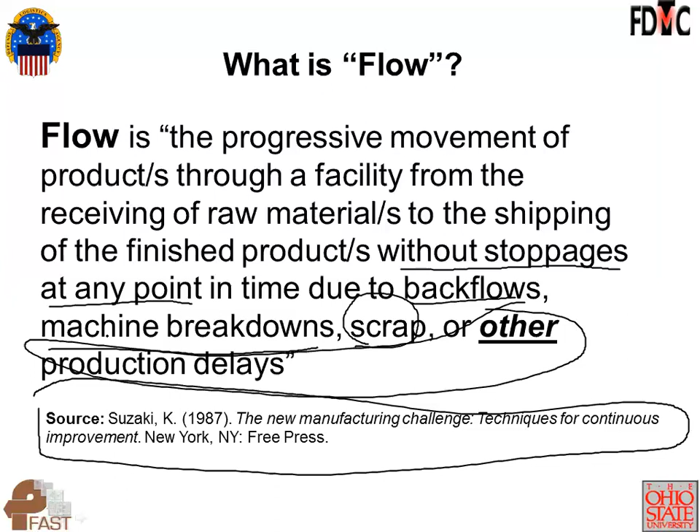So I believe that more than waste elimination, designing a manufacturing system and its support services, the supply chain, for flow is what is better, and that waste should be seen more as a symptom, as a metric, and not a goal unto itself.

So I took my cues for design for flow from this book by Taiichi Ohno, the godfather, the pioneer of the Toyota production system. I read through his book at least twice, and pertinent to this particular lecture about reduction and simplification of material flow, I found some of these quotes in his book extremely inspiring and foundational.

So page 11, he says: I was manager of the machine shop at the Koromo plant. As an experiment, I arranged the various machines in the sequence of machining processes. That's very important—in the sequence of machining processes.

So what he's essentially saying is, look at the routing for every product being produced and ask if the equipment being used to produce that particular product is aligned in the exact sequence as the product would flow through that sequence of machines. And right there you will see the gelling of the concept of functional layout against cellular.

Page 33: We realized that the Kanban system would not work unless we set up a production flow that could handle the Kanban system going back process by process. So there's a connectivity that he thinks is very important to set up. Usually when we design a layout, that's the connectivity we would like to set up, where consecutive equipment requirements are adjacent to each other. But what he's getting at is that production and inventory control cannot be done very effectively if you do not have systematic, streamlined material flow in the first place.

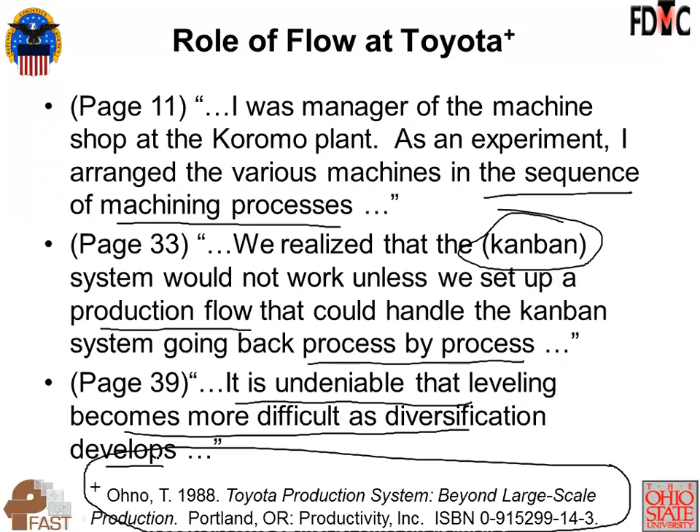Continuing on his book's quotes: Toyota's main plant provides an example of a smooth production flow accomplished by rearranging the conventional machines after a thorough study of the work sequence. Again, that is what we all do in facility layout—we look at how the different products' routings align with respect to each other. The challenge is getting all the equipment for every one of the products aligned exactly in the sequence of steps that the product will follow as it gets made.

Next quotation: it is crucial for the production plant to design a layout in which worker activities harmonize with, rather than impede, the production flow. This is about respecting the design of workstations and how individual workstations sometimes get arranged into U-shaped layouts, because when work cells are designed in a U-shape, employees work uninterrupted inside the U and all logistical support to the cell occurs outside the U.

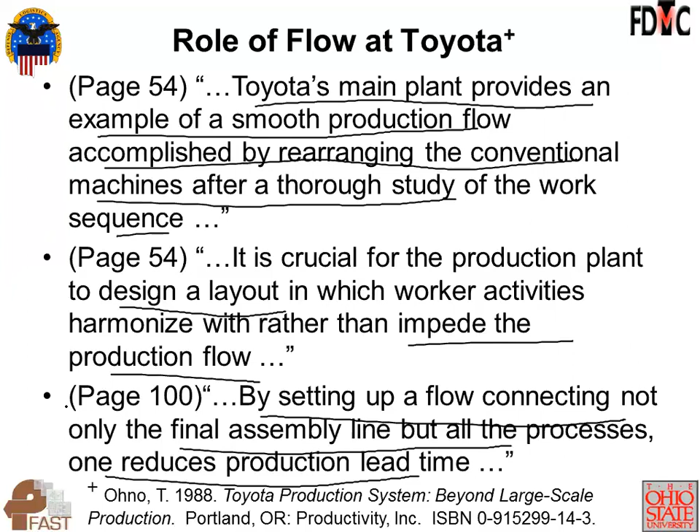Another quote: by setting up a flow connecting not only the final assembly line but all the processes, one reduces production lead time. What he's saying is that the total time it takes for the product to travel from raw material to finished product is implicitly connected to the overall structure of the factory—all the components and sub-assemblies, as you track their movement through various pieces of equipment, are aligned and deliver products to different points at the point of use on the assembly line.

Page 123: when workflow is properly laid out, small isolated islands do not form. Think back again to the debate between functional layout—putting all equipment into departments where similar, identical equipment alone is put in each department—as opposed to work cells, where equipment is taken from different departments and co-located in an area, so the work cell takes charge of producing from raw material to finished product in one area.

Next quote: for the worker on the production line, this means shifting from being single-skilled to becoming multi-skilled. Once again, if you co-locate different pieces of equipment into a work cell, automatically you are going to have to train the employee—they need to get cross-trained and multi-skilled in order to take raw material through steps 1, 2, 3, 4, 5, as many as needed to complete the product. That requires a high level of cross-training.

So personally, I think the future is about better skilled employees, not about job loss. I think there'll be a bigger demand for education and training of employees to work in a more high-tech environment.

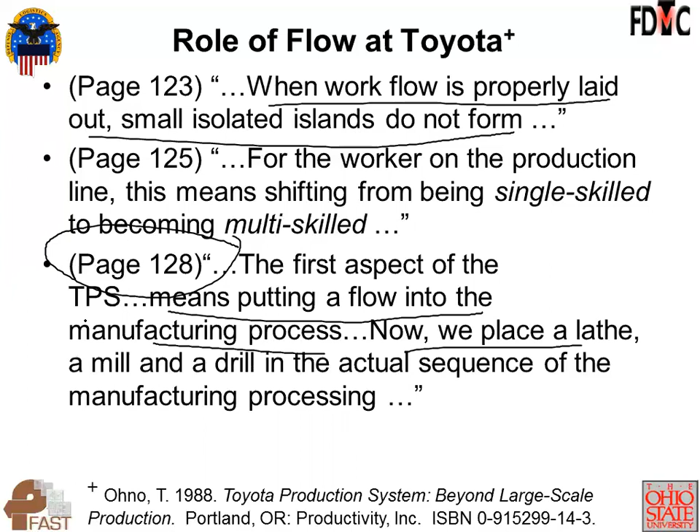When you look at things like value stream mapping, implicit even in those methods is this underlying emphasis on: have I aligned the manufacturing equipment and the overall factory per the logical coming together of the components, the sub-assemblies, and the final product? That is what is fundamental. I think that's what's actually missing in the way US manufacturers have designed their plants, versus how Toyota seems to be thinking about the way they build their factories.

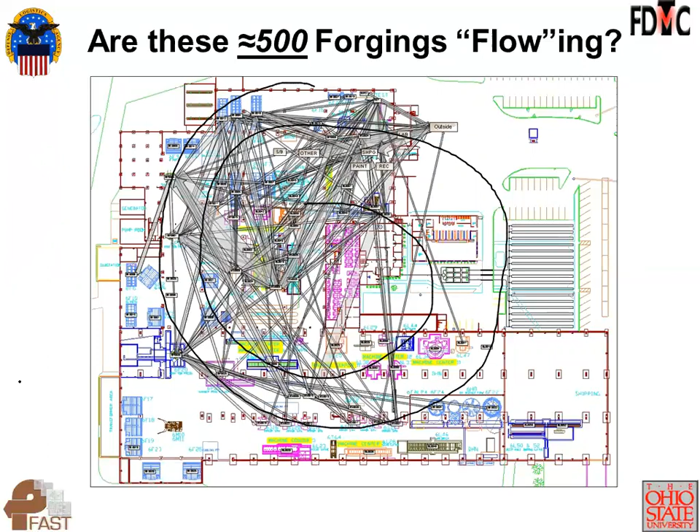They tend to have heat treatment furnaces, which are process or batch production type of equipment. You just don't get one piece flow. And then when you have these large travel distances, communication is poor, scheduling and shop floor control are challenging.

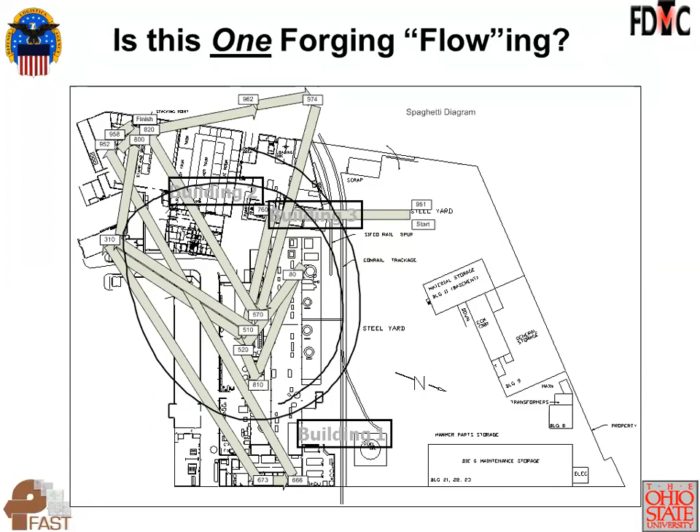Again, a simple spaghetti diagram will tell you quickly whether or not the facility layout is designed for flow. And if it is not designed for flow, then you should understand that there is a lot of cost and delay built into its efforts to fill customers' orders.

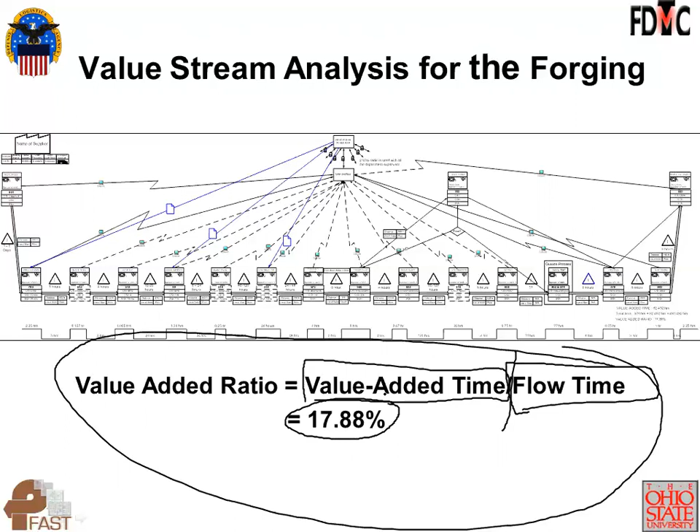I feel that if you worry about the total time that any order spends inside the facility in process, that's way more important than worrying about, oh, let me go and pursue waste elimination as a strategic objective. So in my personal opinion, I feel that...

If we focus on material flow, faster, better, cheaper, and we design systems and processes and support services on the principle of flow, implicitly the occurrences of the different forms of waste is going to be minimized, rather than sort of start by saying, okay, we are going to pursue waste elimination across the enterprise, and then you do what is called continuous improvement by whack-a-mole.

Everybody's doing a little bit of a thing, and then somebody's improvement is coming in the way of somebody else's improvement. So personally, I feel that waste elimination is not recommended. Design for flow is recommended.

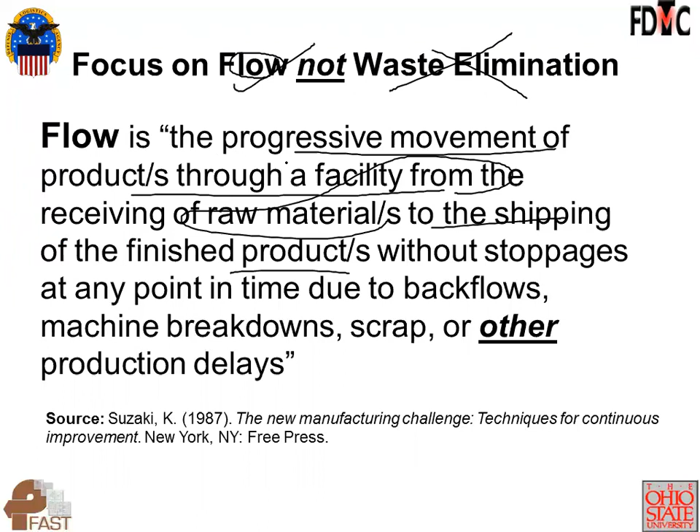Why aren't we able to do that? Why do we take so many weeks to complete an order? Can we bring it down by a few days? Can we bring it down by a few more days?

If we focus purely on what we can do today to bring down the average time it takes us to complete an order, we will be on our way to being lean, to being quick response, to being flexible. That's just a personal opinion.

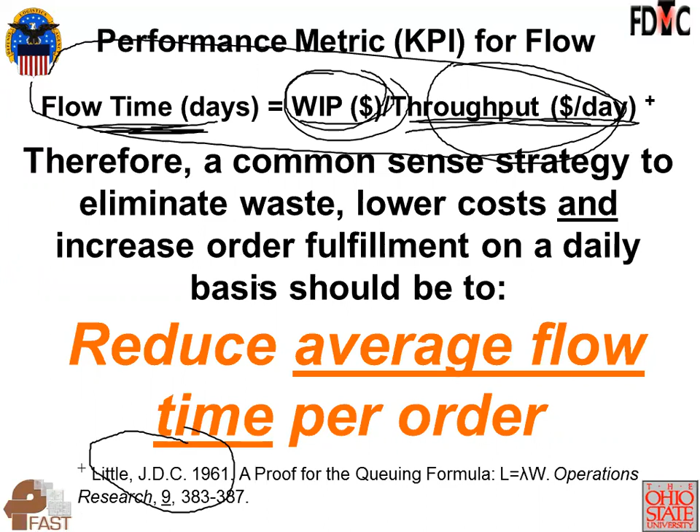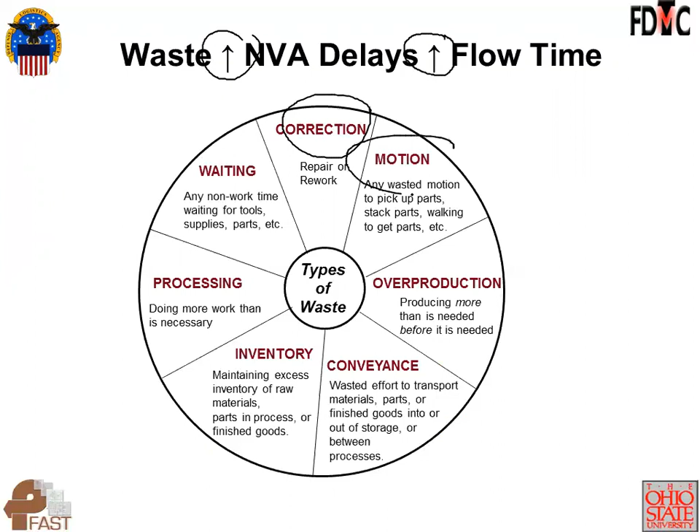Sometimes they use this acronym DOWNTIME or TIMWOODS, but these are 7 ways: correction, operator motion, producing product and leaving it in a warehouse, transportation, any form of work in process, over processing where you take too many steps or have too much setup time or very high cycle times, and of course, waiting. So there are 7 forms of waste, and they help crystallize and measure why it's taking us so much time and dollars to fill an order.

I think it's very important to understand that the wastes translate to delays in flow time.

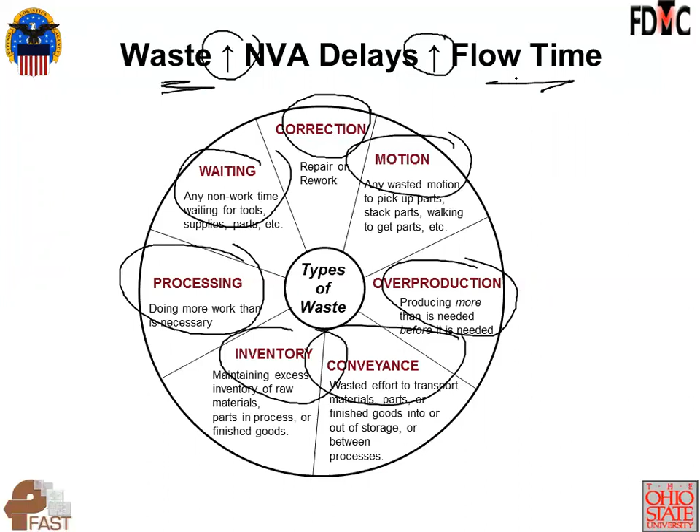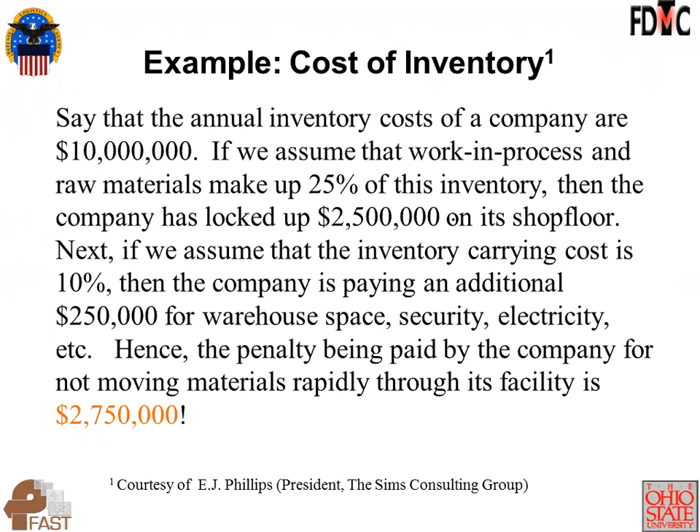Accountants may have better ways to quantify the total cost accrued of any order as it runs its way through the shop.

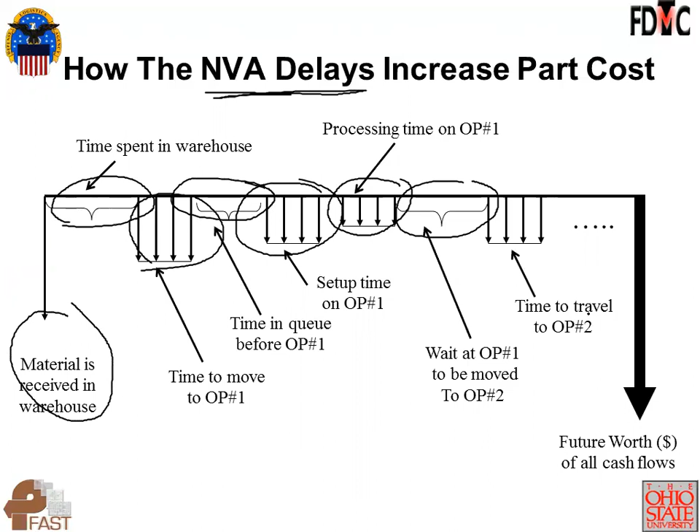And then it repeats, and this continues. When you look at all these activities and reduce them to point cash flows or uniform series cash flows, you can compute something called a future worth. That future worth is the true cost of an order, which oftentimes, because accountants and estimators are not factoring in the 7 forms of waste, means they may be underquoting on their margins to customers.

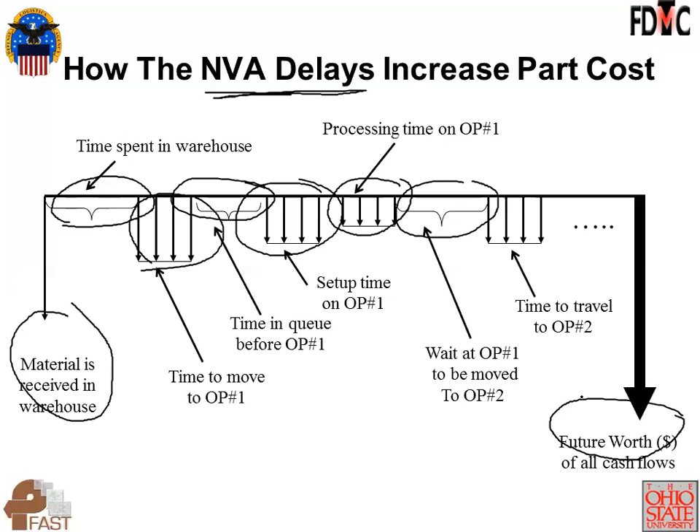What has come out for sure over time—and this was a chart created by Professor Eugene Merchant, recognized as one of the gurus of metal cutting, back in the 70s—he looked empirically at the total time a machined part spends inside a machine shop. 5% of that time was spent actually on the machines, whereas 95% of the time in the facility was spent moving and waiting. These are 2 of the 7 forms of waste.

What was interesting was he came back and said that even that 5% the part spends on the machines, only 30% of that time is it actually having work done on it—metal being removed. The rest of the time is necessary preparatory work, but the part isn't gaining value. It was pretty interesting that back then in America, somebody had recognized the connection between lost time and cost and order fulfillment. And this was in machine shops, not a big assembly line like Ford.

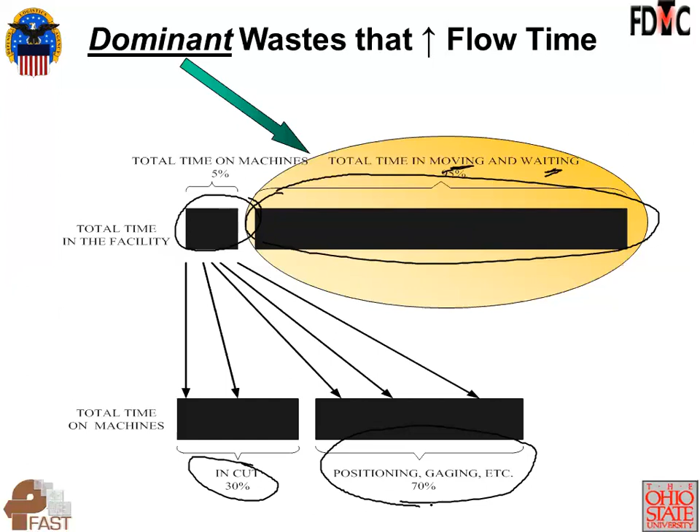So when you want to connect how factories are built to get good flow and the total time it takes to complete an order, here's the domino effect. When a facility layout is badly designed, where you have not factored in the placement of equipment to conform with the actual processing sequences of different components and sub-assemblies, you will find that the average travel distance per order is high. When that happens, transportation waste is high. And when transportation waste is high, work in process waste is high. When work in process waste is high, waiting waste is high, which implicitly results in flow times being high, throughput and orders completed being low, and the overall operating cost of the facility being high.

So there is no mathematical equation here, it's kind of empirical, but the point is that if you are not flowing the product because you've got large travel distance of separation between consecutive operations, end of the day you're not going to be profitable. Recall what Goldratt said about the 3 primary metrics that should run a business: have you got high throughput, sales dollars? Have you got low inventory costs? And have you got low operating expenses? If you haven't scored high on those 3 goals, you're not running a profitable business.

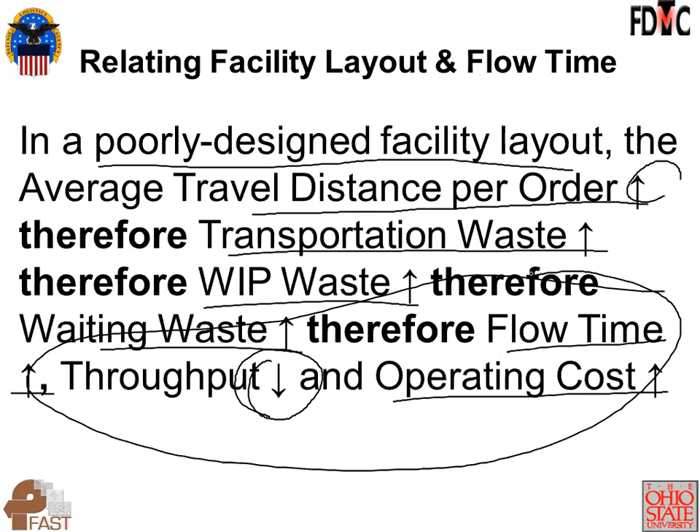How do we connect facility layout and work in process, which is basically travel distance, and the effect that has on batching? This quote came from a book from 1990, and it very simply said, if successive processes are immediately adjacent, as in an assembly line, a single unit is moved at a time. So in an assembly line, a single unit is moved, that's the lowest amount of inventory you can have.

Now put the 2 consecutive operation equipment across the aisle, that's about 14 feet, correct? So now you cannot have the operator from one machine, after they finish one part, immediately walking across and giving that part to the next machine across the aisle.

So what they do is they handle it with a lot size that is a unit load. They will either fill up a pallet, let's say a batch of 50. Those raw material pieces, like forgings or bar stock, will come on a pallet as a batch of 50, or they'll come in a container as a batch of 50. What will this machinist do? Only when they finish all 50 parts will they bring a pallet jack or forklift and cart that container across the aisle to the next machine.

So the moment the distance went from 6 feet to about 14 feet, the transfer batch size went from 1 to a container. Now if you increase the distance even further, if the next process is across the plant, the handling lot size is at least an hour's supply. So your batch size goes up, and when batch size goes up, work in process goes up. When work in process goes up, your queuing time, your travel times, and your throughput delays increase. And if the next process is in another plant, the handling lot size is at least 1 day's production. So implicitly, the increase in work in process costs are directly related to the travel distance that is recorded and experienced by any part.

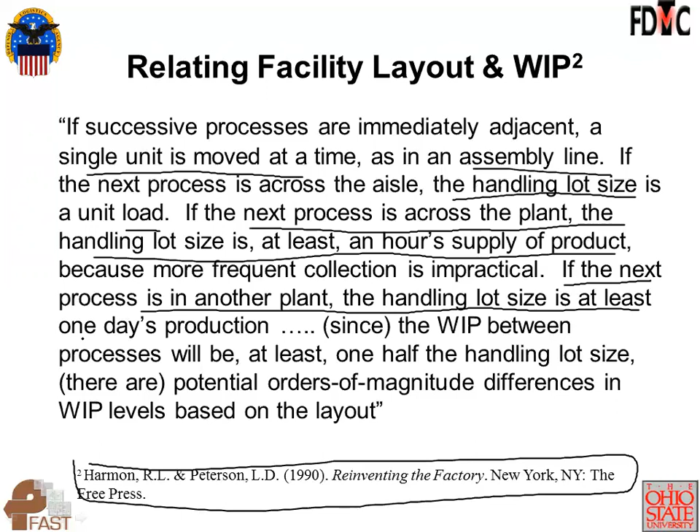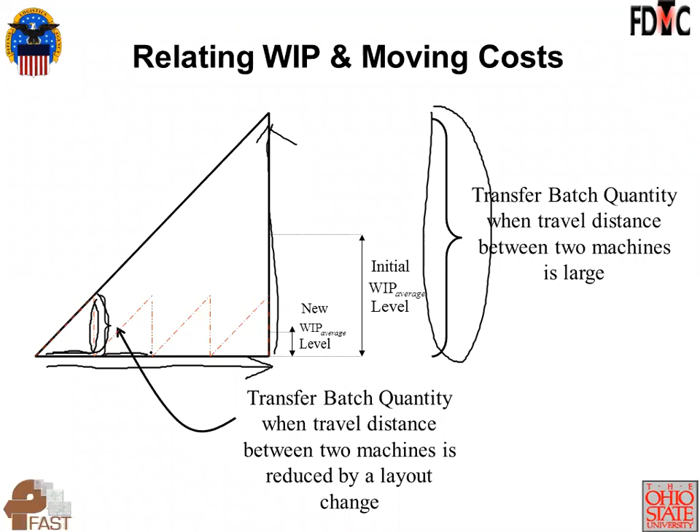So this case is where a lot of inventory is built up before that batch size is moved to the next machine. And this case is where you have shortened the travel distances, and now you are able to operate in the mode of transfer batches. So the machine runs for some time, it creates this inventory, and that quantity is immediately moved to the next machine. Once again the machine keeps running, so much inventory is built up, once again it is flushed to the next. So even though this plus this plus this plus this is equal to this, the quantity produced is what is needed, but the buildup of inventory changes from a batch size to a transfer batch size.

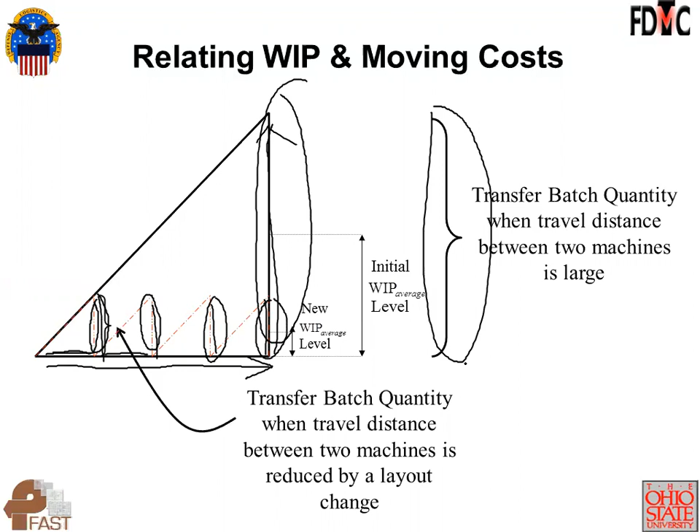So there are 4 transfer batches here that effectively equate to 1 big transfer batch. And when you reduce travel distances between consecutive steps, you will have this ability to make some, move some, make some, move some, which implicitly will bring down the work in process cost and the costs associated with batch production.

So how do we reduce these wastes? We know that transportation, waiting, and inventory are significant forms of waste in any production environment. So how do we reduce those dominant wastes? That is where this concept of design for flow came.

And again, I'm not the first one. This is not unique to me. I basically adapted this from Tompkins' textbook on facilities planning. They discussed these ideas early in the book. So there are 3 principles: minimize flows, maximize directed flow paths, and minimize cost of flows.

Nowhere have I mentioned waste elimination, because I believe that through good layout, efficient material handling, smart storage systems, good production scheduling, and effective shop floor control, you implicitly will be doing the things which minimize the 7 forms of waste. So the important thing is to implement these principles and reflect them into the design and operation of the production system.

So how do you minimize flows? You eliminate operations, you combine operations, you try to do multiple products which should go together in one trip.

The second principle is you maximize directed flow paths. This essentially comes from the assembly line concept, and we do that by eliminating backtracking and reducing cross flows. Finally, when you do have to move material, you minimize the cost of moving.

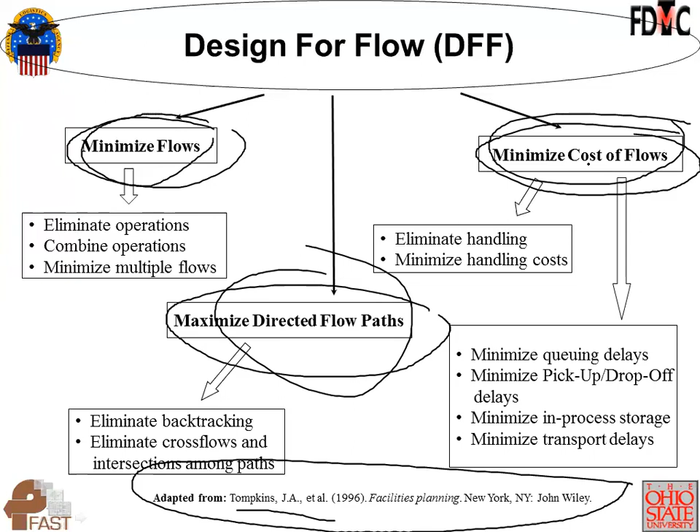So some strategies to minimize flow. Remember, the first principle was minimize flow. On this slide, I discuss these strategies. Again, it could be the way the layout is designed, the way the product is designed, or the technology which you use to process the product.

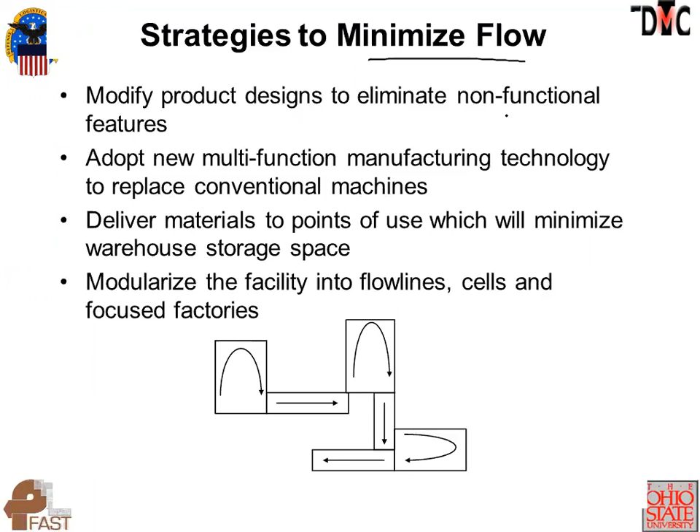In some cases, you might eliminate the product and say, why are we making this special variant when we are not really getting much profit and much volume of that particular part?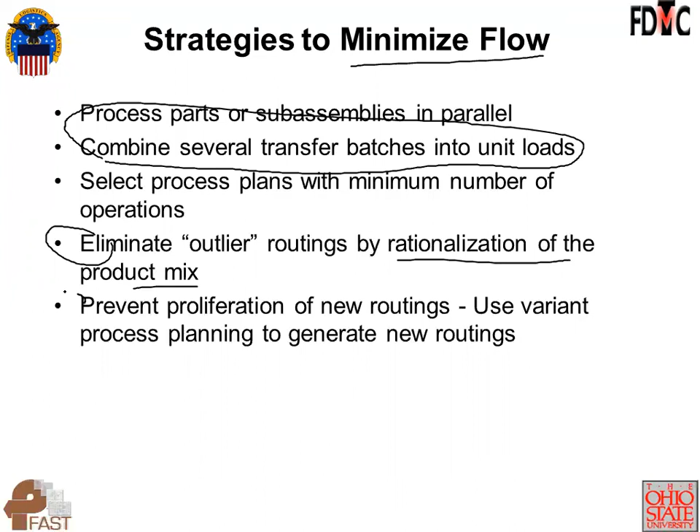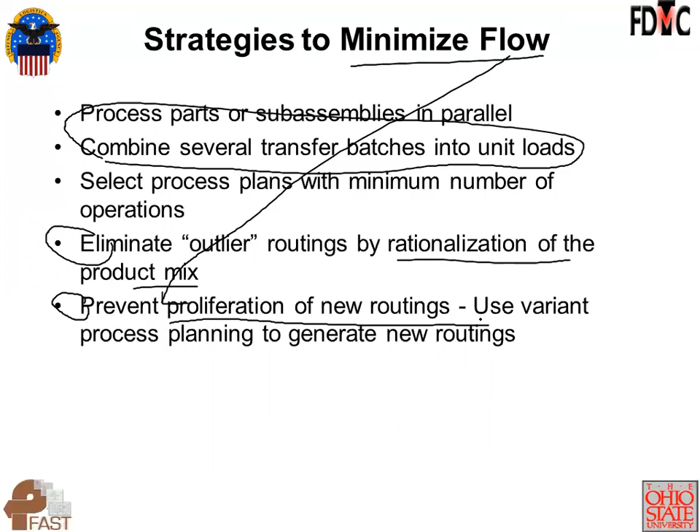Very important to minimizing flow is preventing proliferation of new routings. Especially in small, medium-sized companies that are make-to-order, they really don't keep track of the fact that many times they may be designing from scratch, planning from scratch, the same part or variants of it. If they put more time into controlling how many unnecessary drawings and tooling packages they're designing, implicitly you will minimize the flow of product.

So then the second principle is maximize directed flow. In this chart, I discuss how to recognize a good and bad directed flow. If you create a spaghetti diagram, that might be a better context in which to discuss the different types of flow.

Forward and in-sequence flows in one aisle are the best. Imagine this is an aisle, right? It separates 2 banks of machines. If you are sending parts from machine to machine in sequence, that's perhaps the best forward flow you can have.

So what's the next relaxation of good flow? You allow flow to occur to machines across one aisle. Forward flows between parallel and adjacent lines of machines separated by a single aisle are okay. That's the second. And then, of course, the worst cross flows are where you can see that one part literally jumps across multiple aisles and goes to a machine in another aisle.

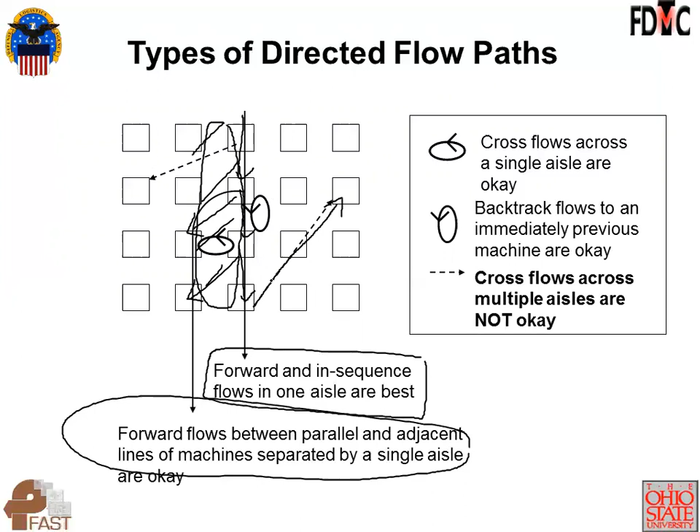So spaghetti diagrams, if designed correctly and comprehensively, will help you quickly see if your facility layout, your product mix, and your manufacturing sequences combine to have good directed flow or poor directed flow.

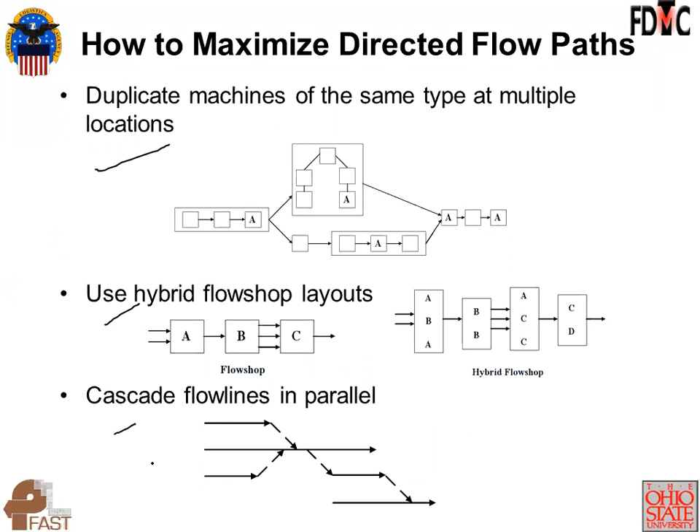So again, how do you maximize directed flow paths, which is the second principle of design for flow? These are various strategies, almost like individual lectures sometimes, so I will not spend time on them.

If you have interest, please email me and I'll be happy to discuss a specific strategy. You've heard about U-shaped cells, W-shaped cells, S-shaped. It's all built around compacting a linear line and allowing fewer people to work safely inside a secured zone. I believe personally that the 26 letters of the Roman alphabet each represent a certain flow pattern. The challenge, of course, these would be NP hard problems, is once you have a hospital or a warehouse or a machine shop or a fabrication shop, once you have the flow network captured, say, as a from-to chart or a product process matrix, how do you fit that flow onto one or more of these alphabets to decide this is the best flow I can get, and this will be the ideal arrangement of my equipment to get flow in the facility.

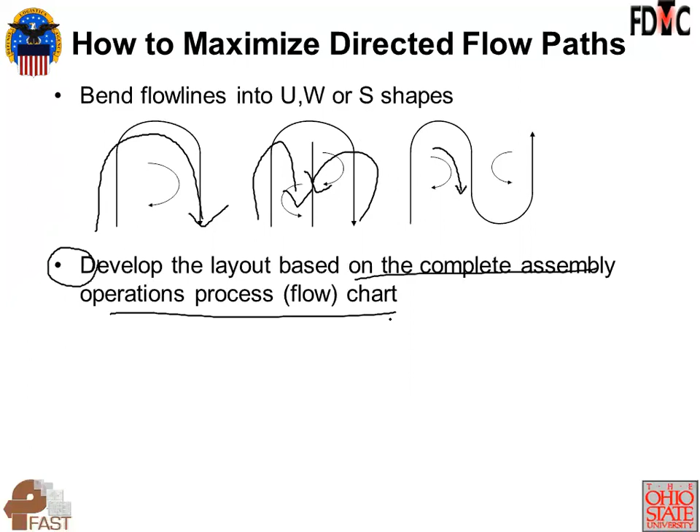I think the most important thing is, look at the products you make. If there are assemblies, make sure you develop what is called the operations process chart for the entire product. These are standard charting methods taught in any industrial engineering textbook on methods analysis or facilities planning. The difficulty is that they get pretty hard to analyze visually and manually, and that is an opportunity for today's operations research and data science methods to help us solve.

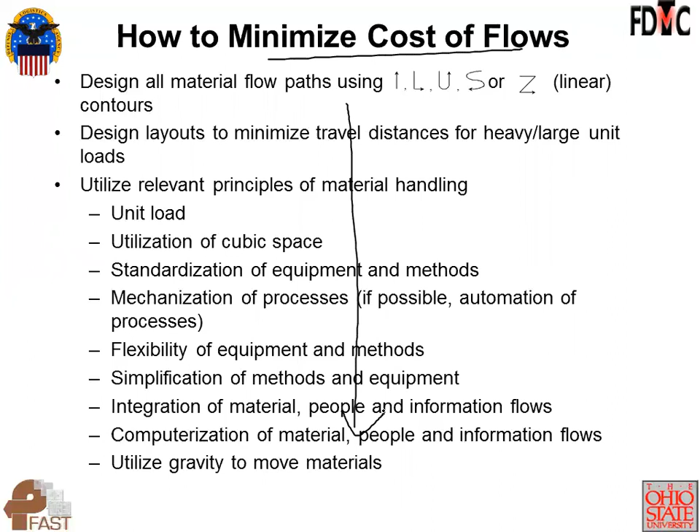So finally, the third principle is minimize cost of flows. Again, a whole bunch of strategies, lots of explanation—just give me a call and we can discuss. How do you minimize the cost of flow? You just minimize how much space you leave between machines for one process to fill up the work area in front of the other process.

So theory of constraints and drum buffer rope scheduling, while they may not be very mathematical, they're very effective to implement. It doesn't take rocket science to know that, especially if you have a linear production system, if you find the bottleneck and then subordinate the entire system to the rate at which the bottleneck processes product, you automatically control how much raw material is pulled by the first process step, processed, and becomes work in process in the rest of the system.

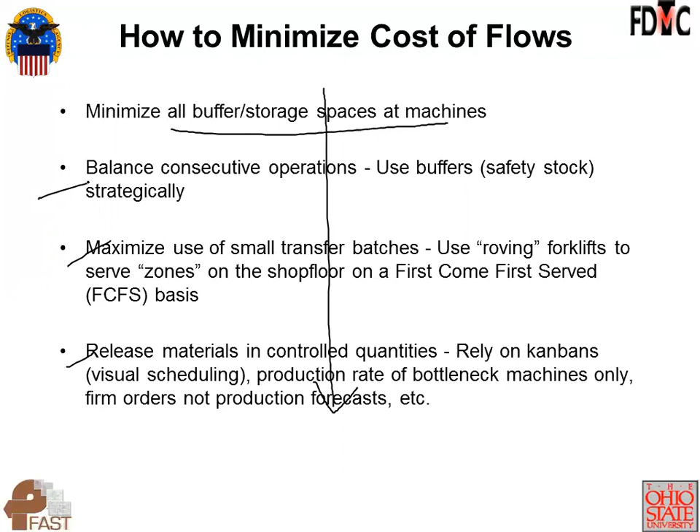A lot of these strategies are combinations of production control, scheduling, material handling, and facility layout, and of course the type of equipment you have, and the way management policies drive how people run their machines, whether they do single piece flow, transfer batch flow, or batch production.

These guidelines came from Professor Apple's book, 1977, one of the inspiring textbooks on facilities planning, because Professor Apple demonstrated both a knowledge of operations research and practical industrial engineering. I can't say that about current books, but in all of these principles, I believe each of them guides you to design a factory and operate a factory, use material handling systems and shop floor control systems and technology that at the end of the day basically says faster, better, cheaper, waste-free production.

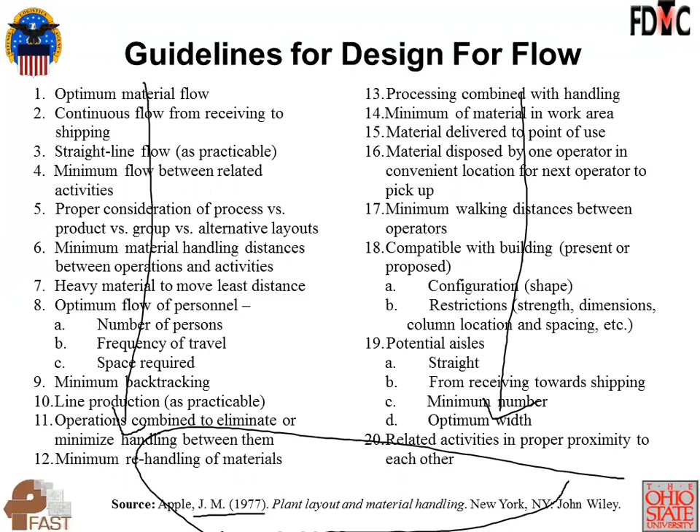So once again, I cannot say that it's clearly known how to use which combination of guidelines. I would advise you to use these guidelines as a checklist of sorts. I have a Xerox copy of his book, and after designing the layout, I've always got together with students, got together with clients, and said, let's take this checklist and ask ourselves, have we achieved a large number of these guidelines, or do we have a glaring omission of a couple of those?

So please understand that I think we in America did know how to design good factories. Somewhere we went towards efficiency as opposed to effectiveness. And then today, everything we do is driven around what Toyota does, because somehow it seems Toyota figured out how to take such knowledge and use it correctly.

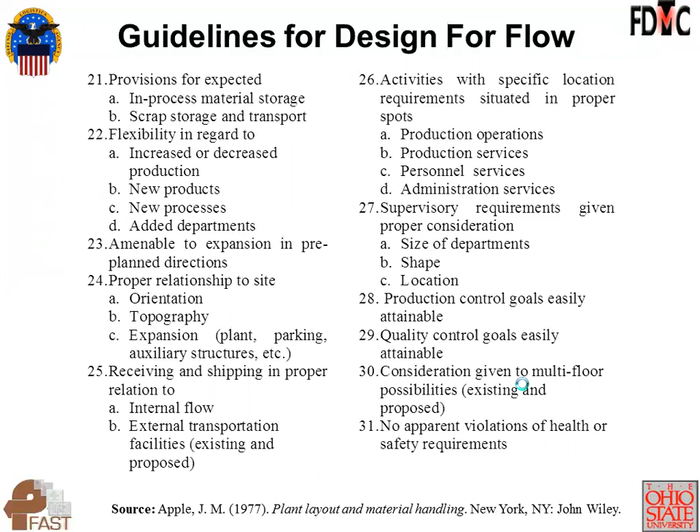These slides are obtained from Ray Keefe. At that time, he was the vice president of manufacturing at Emerson.

What he basically said was the product design, what we do for design for manufacture and assembly, if done efficiently and effectively, will implicitly minimize the effort needed to flow the product. Essentially, what DFMA (design for manufacture and assembly) does is optimize the first principle, which is minimize flow.

So when you take, say, a welded fabrication and you cast it or 3D print it instead, you effectively eliminate all the wastes and delays that come from making different components, coordinating them, fixturing them, and then welding them. It makes complete sense that you don't want to rely purely on factory design and operation to minimize cost.

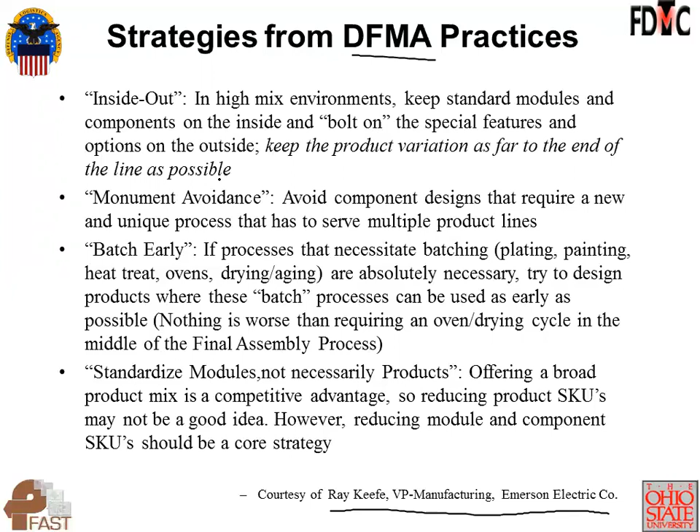Much of the cost and waste is in the product design and the technology used based on that design. Some more strategies: how do you implement design for flow? For years I studied a method called production flow analysis, and flow is the common word between design for flow, production flow, and the 7 forms of waste created by bad flow. Of course, the metric we want to optimize is flow time.

In my experience, implementing production flow analysis across the enterprise at all levels implicitly results in a production system designed for minimum waste and rapid flow.

So what is production flow analysis? It's a technique originally designed for machine grouping, part family formation, cell layout, and overall factory layout, developed by Professor John Burbidge.

The beauty of this method is that it's used for factory design, but it's applied in 4 stages, each progressively smaller. In each stage, he's looking for flow—minimizing flow, maximizing directional flow, and minimizing the cost of flow. The 4 stages are: the entire factory, each shop in the factory, each cell inside the shop, and each machine inside the cell.

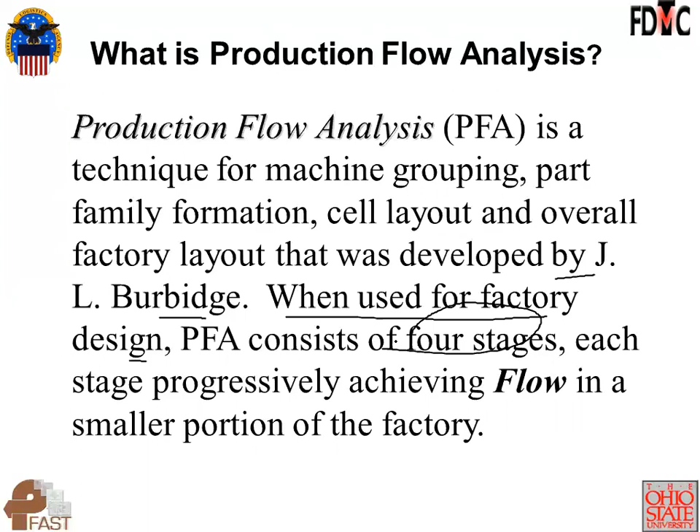That's amazing, very well structured. So there are 4 stages. Factory flow analysis develops a unidirectional flow system joining the various departments—we'll see an example later—and each department completes all the parts it makes.

Then there's a step called group analysis, which looks at each shop. Then there's line analysis, which looks at the flows in each of the cells formed by group analysis inside each shop. Finally, there's tooling analysis—the movement of tools, the operator, the part, the gauges, and fixtures. You're trying to minimize flow delays and flow costs at each machine.

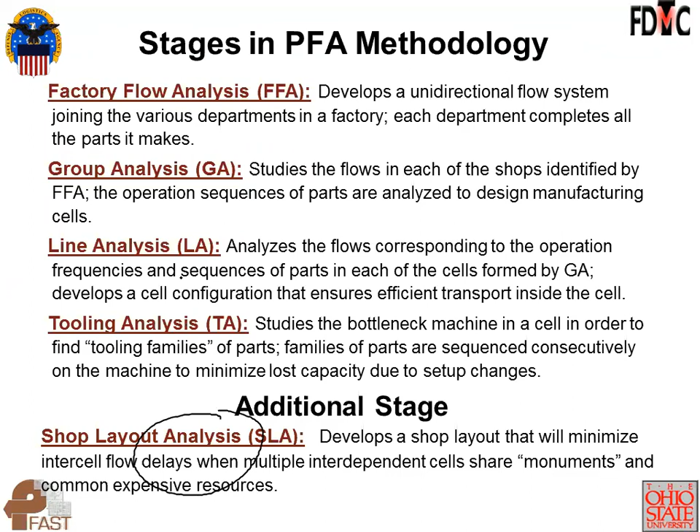So what's the first stage of factory flow analysis? You look at the individual departments that comprise the entire factory—raw material, sheet metal work, forging, a welding department, a machine shop, assembly, and of course the vendors. You're looking at how product flows between the big areas, the big departments, the big shops.

Oftentimes, the best way to simplify factory flow is to combine large departments. There are many ways to look at factory flow—some approaches use a design-focused factory, segmenting the product mix by volume, revenue, and demand stability, then designing 2 or 3 mini factories. But essentially in factory flow analysis, you're trying to minimize the back-and-forth movement of product between shops and departments.

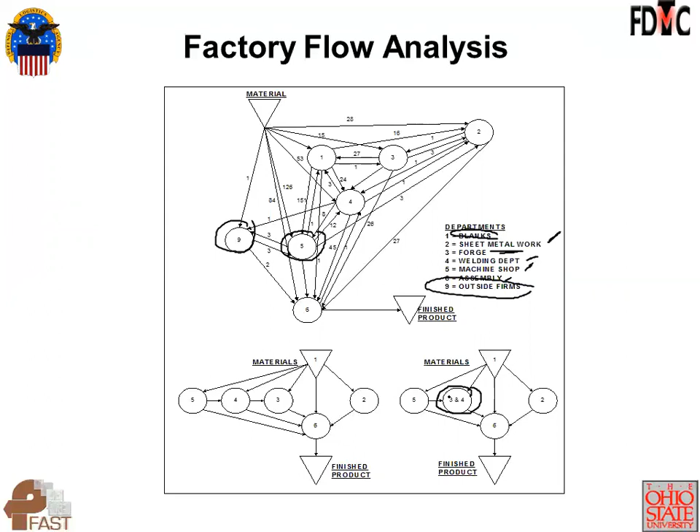That's the first stage in production flow analysis. The second stage is the classic cluster analysis mode, called shop flow. In shop flow, if you have a machine shop, you're taking all the machines and all the parts.

Each X represents that this machine is being used by this part. You reorganize using cluster analysis techniques, so the same matrix now looks like this. Same machines have been ordered this way, and some machines have been duplicated. The same parts have been reordered this way. Now what you're seeing is what is called a block diagonal form.

So certain machines make certain parts. And you see these exception operations - you will find in most applications, no matter how good your clustering techniques, just the way the product mix is set up, just the way the routings were designed, there'll be a lot of outside operations. So in these matrices, these areas are going to be full of ones, and these partitions will sometimes not be very easy to figure out.

To me, in a high mix environment, this phase of analysis actually becomes a large continuous improvement process where you start saying, why should a particular part have to go to other cells to access or utilize machines? Why couldn't that machine be inside the cell? Why is that machine even necessary?

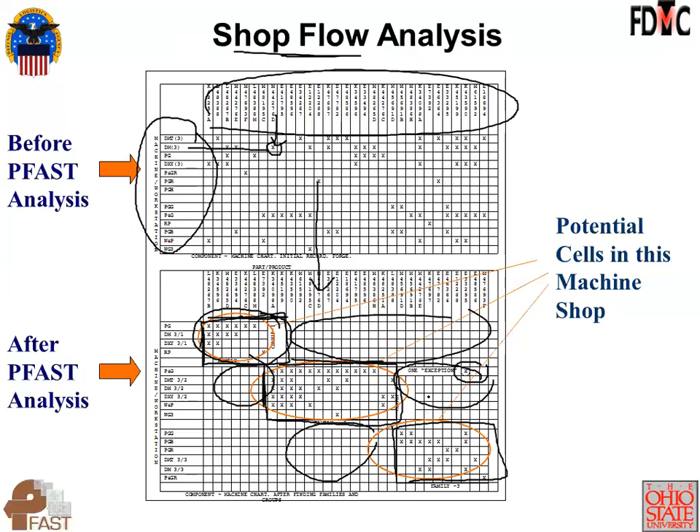This is cell flow. It's also line analysis. Essentially what you're saying is, inside the cell, how should I arrange the equipment so that I have continuous transfer of product from one machine to the next, so that one person could oversee at least two machines, so that the cell does not have to rely on outside services and support. It could have its own internal assets.

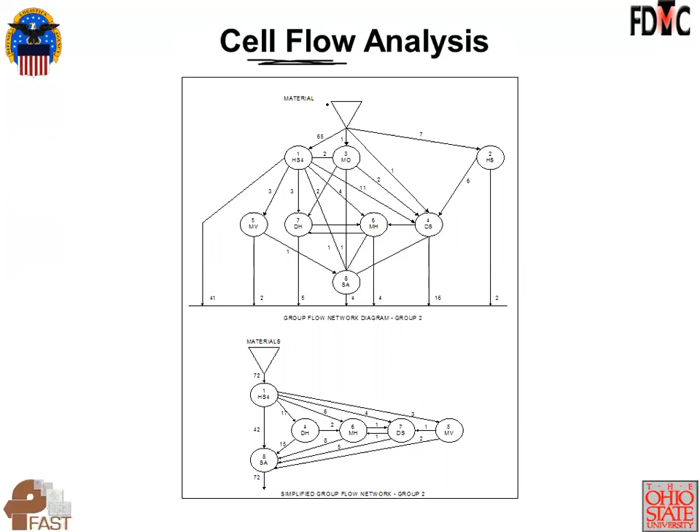So that's the third phase of flow improvement. In this case, you're focusing on flow improvement, design for flow inside each cell.

And then finally, you have what is called tooling flow analysis. So here, what you're doing is you're taking a family of parts and you're creating something called a composite component. A composite component is one component which has all the operations which are needed to make all the parts in a particular part family. And then you tool the machine to produce this particular part.

That way, simply by indexing the turret head, you are able to bring the appropriate tool to work on the particular part. And imagine this right today with machining centers which have tool magazines which can hold hundreds of tools. You can basically take a 5-axis machine, tool it for a family of parts.

That same machine has a pallet changer, and each pallet has different parts, and that's how you get lights-out machining. All the programs, all the tools, the fixtures, everything has been set up. You hit run, the programs automatically execute.

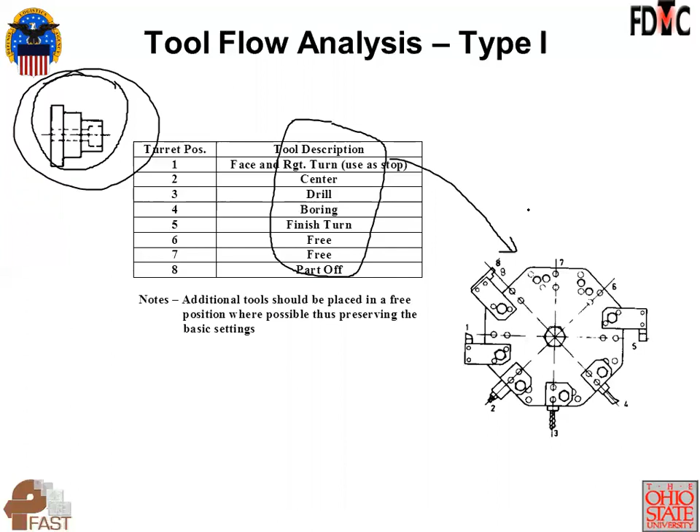The program knows which pallet has which part, and that's the amazing part - that with tooling analysis, you're looking at how a particular machine's utilization can be optimized, especially in today's time and age when you've got a level of automation and monitoring that's unbelievably sophisticated.

This is the second form of tooling analysis. This is where you try to understand all the setup requirements, tooling requirements, surface finish requirements, and you actually estimate parts and design tooling families, where a particular group of parts in a cell should have their tools and gauges available in one cabinet. Another set of parts should have their tools, gauges, and other accessories in another area.

When you make parts, you can see there's fixturing, size issues, shape issues, feature issues, boring issues, and then material condition, surface finish and accuracy condition. So all these factors combine into the eventual design of the tooling, the fixturing, and the machine set.

So that's production flow analysis: factory flow analysis, shop or group flow analysis, line analysis which is flow inside a cell, and then tooling analysis, which is essentially optimal movement of man, machine, tools, and product at a particular machine.

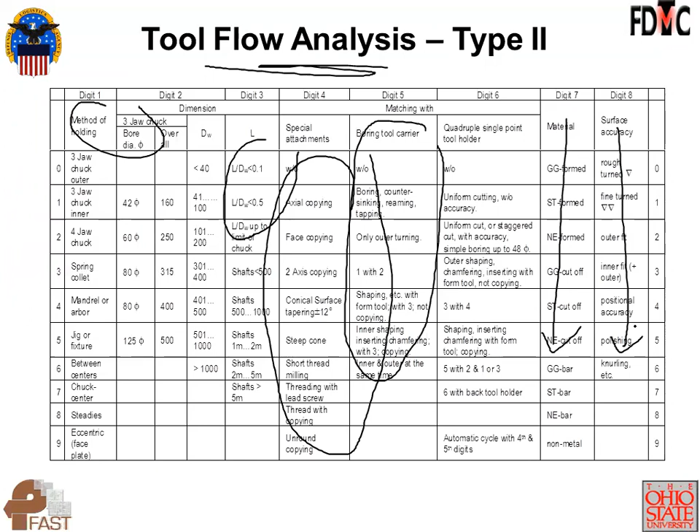So how could flow be applied to the entire enterprise? Think of it this way. Any OEM's factory could apply production flow analysis in 4 stages. Then they will have their sister factories or their supplier shops, and you can essentially apply this production flow improvement to any factory, any supplier. That's how universally applicable I found production flow analysis and design for flow to be.

This implements the principles of lean and pursues waste elimination more as a metric rather than as a goal. But in all of these, single machine, cell, shop, factory, all the other facilities in the enterprise would be organized that way. And then each of them will have their own suppliers, so each supplier could essentially have this approach implemented to improve their operations.

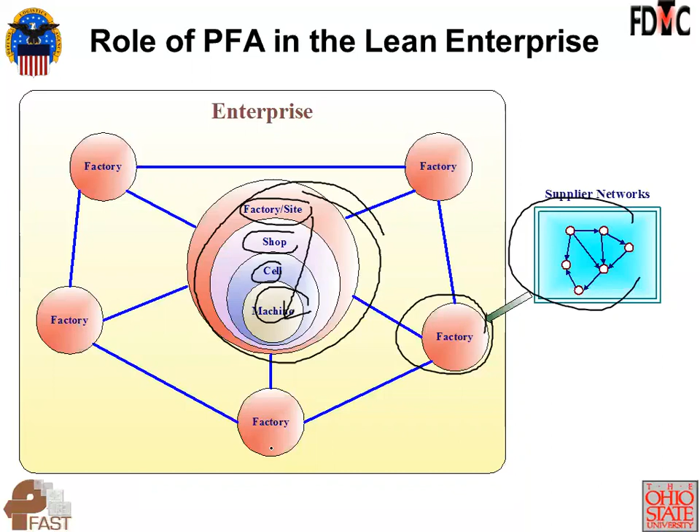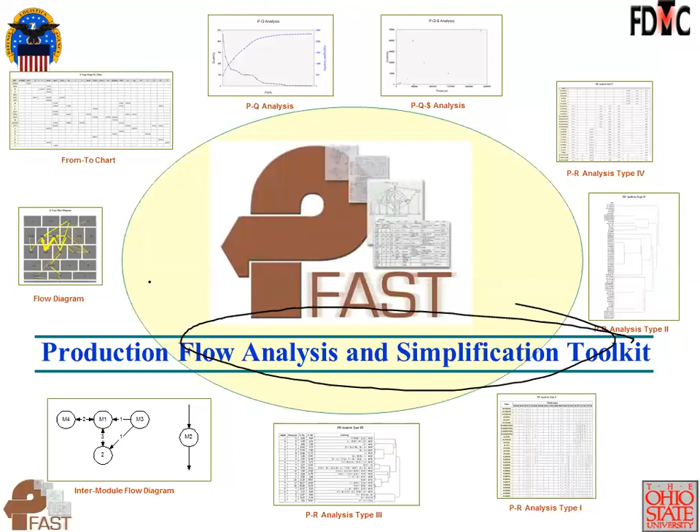I believe that the time is right for us to get away from the 20th century lean tools which were manual. We use things like 5S and setup reduction and single piece flow cells and spaghetti diagrams and value stream maps. Today, with the amount of data that we have available and the capability with software packages like Python or R or Mathematica to analyze this data, I think that we can apply the algorithms of production flow analysis extensively. It's just a question of pick the area of the business where you want to apply it and run with it.

So the beauty of the PFAST software is that over the years, I found that different outputs of the software can be used to implement these individual improvement strategies. And I call them LATs, Lean Advisory Tools. So you can see on the slide, there are various improvement projects that you can do.

So you don't just jump into a factory and say, oh, I'm going to apply production flow analysis to be able to implement design for flow and lean. There's ways in which you can break down the overall improvement plan into these individual projects, and then cascade them in an appropriate sequence depending on what problems your facility is encountering.

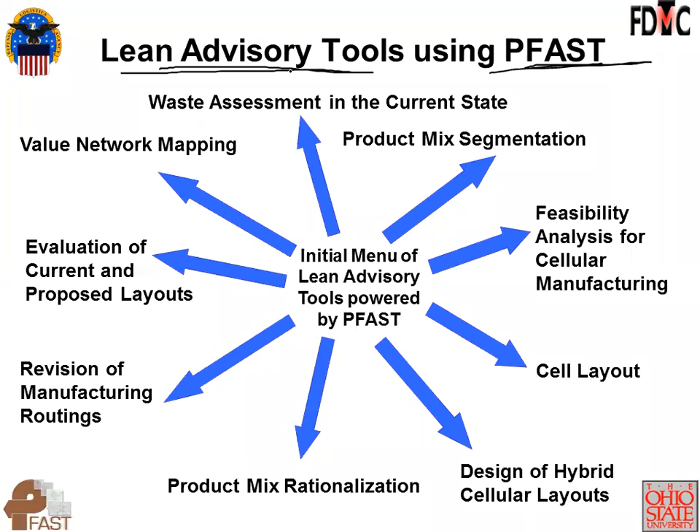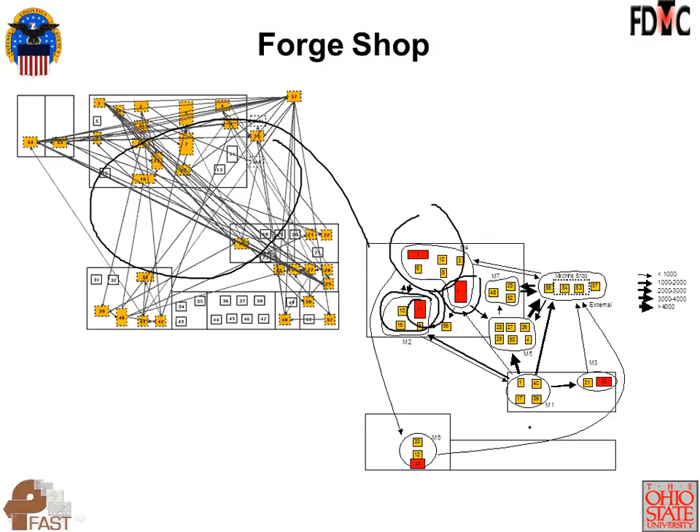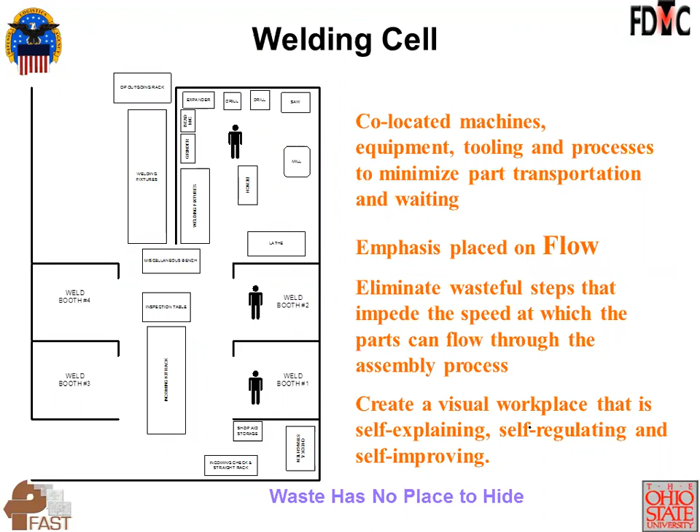This was a welding cell. They sent us a lot of aerospace engine components, and with the analysis we did, they were able to implement this welding cell.

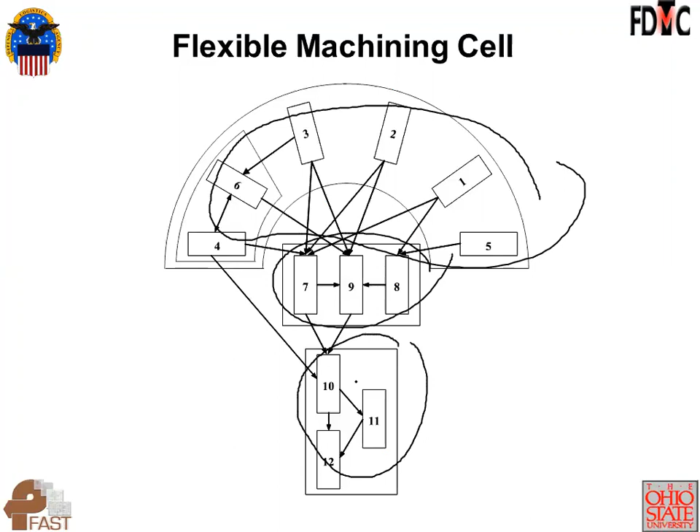So this is almost like a hybrid flow shop. Why is it hybrid flow shop? You've got three stages of the shop, and there are different machines in each stage. So stage one, stage two, and stage three. And because you want short travel distances between all machines, since stage one has many machines, it's kept in a varied arrangement, and then here you're allowing one person to work on at least two machines.

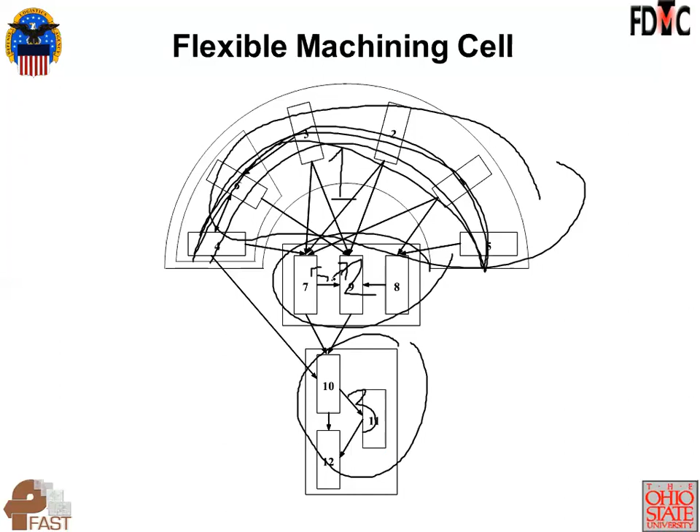Okay, so that's a flexible machining cell, many different parts, many different routings. Personally, over the years, I've kind of come to the conclusion we should not have put all those parts into one part family. They didn't belong together, and this is too complicated a flow for us to be claiming flexibility. But again, with today's technology where multiple machines can be combined into one machine, who knows, it would still be possible to have this cell operation.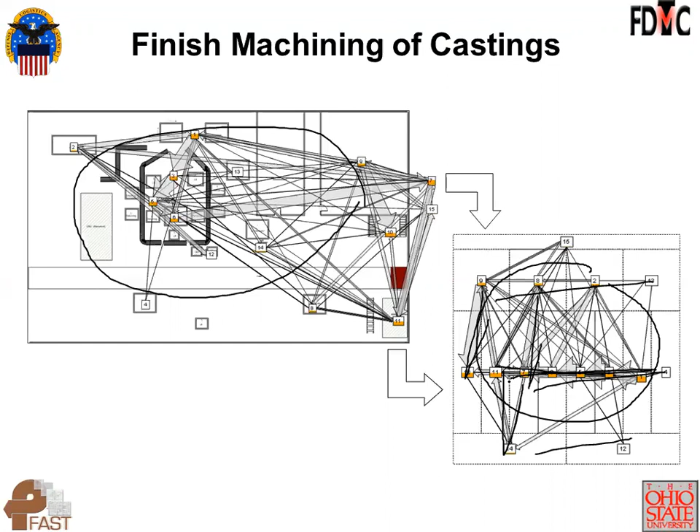This was a pipe fabrication job shop, and one of the failure projects that we had. The biggest issue was they had a single common wash tank. So no matter what pipe they produced, in whatever quantity, since it had a lot of cutting oils on those pipes, they would run them to this monument. And even though we implemented work cells and created modules, it was not the right solution.

When we walked away, we told management that we don't think layout is a solution. You are just not going to get good flow. The bigger thing was to understand their business and accept that they could not be in the business of making any pipe in any quantity to any due date for any customer. There had to be a reining in and a strategic plan as to what types of pipes they would fabricate, what kinds of quantities they would accept, what kind of pricing they would have, and then to train their salespeople to be more strategic and considerate about when they negotiated an order. Failing which, we walked away from this particular client because layout was not the solution.

You can't have a complicated factory logistics and try to be lean and flexible. You have to simplify. You have to streamline.

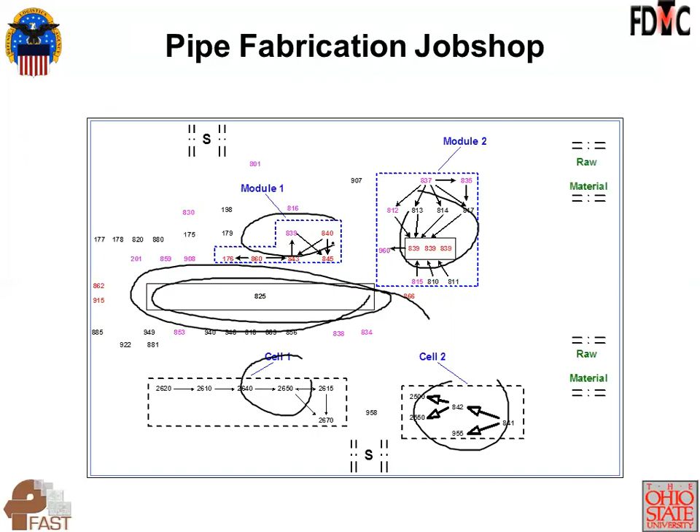This was Mettler Toledo. This was a scale - they make those large industrial scales that weigh 18-wheelers on the highway. What you see here is the layout we proposed to them for their fabrication factory. And the way the factory was designed, this was a violation, and a little bit of this was also a violation. But unfortunately, because they had built the facility several years ago, they said, well, thank you very much for your ideas, but we are not going to undertake to rearrange this facility.

And I think that is why design for flow is so much of a design goal by itself. We've talked about product design as a means of reducing the costs and delays of bad flow. I think that the way you build the factory from the get-go is also important. So many companies just take the attitude of, yeah, just put the equipment in process arrangements and we'll figure it out. And then for decades, they are stuck with costly material flow and material management.

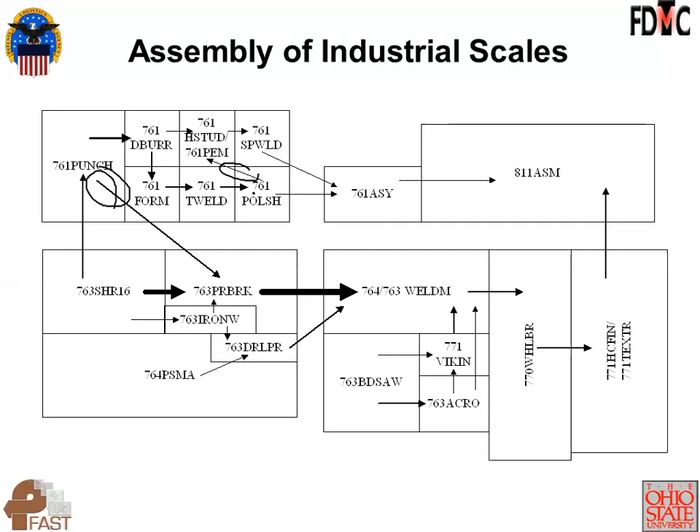So this was designed using the bill of materials and the operations process chart of the entire product. And this case study is actually discussed in my lecture on value network mapping.

That's about the end of my lecture. A lot of this work was done when I was supported by the Forging Defense Manufacturing Consortium and the Defense Logistics Agency. I haven't given his name here, but there's a gentleman named John Turpak. He was the director of the Forging Defense Manufacturing Consortium, and he funded all my research on design for flow and job shop lean and the FAST software for 8 years, 2004 to 2012, before I left Ohio State. So this is again acknowledging their support to make job shop lean a reality.

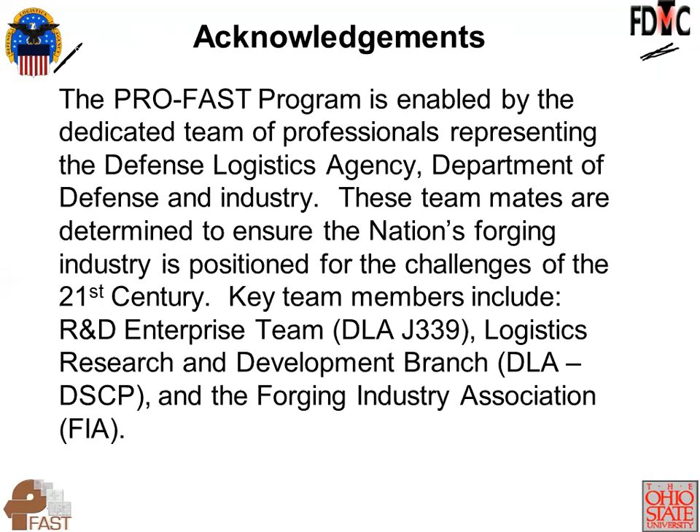What is important to understand is that when you go in and say, I want to implement lean, if you look at the principles of lean, they tell you to solve 3 major industrial engineering problems first. Find your product families, design the facility layout to conform to the logical flow of products in each of these families, and then try to schedule production subject to finite capacity constraints. So part family formation, facility layout, and production planning scheduling. These are classical, well-known industrial engineering areas of study and expertise. And you can say bye-bye to a lot of things like waste elimination and single-piece flow, and basically reduce lean manufacturing to hardcore industrial engineering problems.